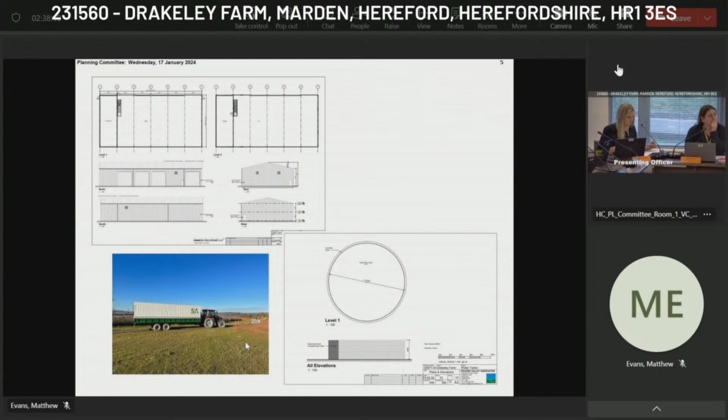This slide identifies the proposed relocated access. If approved, all vehicle access into the site in connection with the growing of soft fruit will be from the proposed new access at the northern edge of Marden Road. The access has been designed to accommodate the required manoeuvres and visibility splays of 56 metres in each direction, as a result of the speed surveys undertaken. The existing access adjacent to the residential property 3 Hawkshead Cottage is to be closed, with landscaping and planting provided adjacent to the boundary with the new access track and residential property.

It is recognised that traffic generation arising from the proposed development represents a key issue for many of the local residents and that of the parish council.

As already mentioned, once the fruit has been picked, it will be transported back to Brook Farm to be processed. The route to be taken is that from the new access through the centre of the village and the residential area of Walker's Green, back to Brook Farm. No HGVs will access the Drakeley site. The fruit will be transported via the tractors and trailers, a photo of which is included at the bottom.

The application has been supported with a transport statement which identifies the proposal will result in 12 two-way movements per day from the site back to Brook Farm. This is 6 arrivals and 6 departures. All seasonal workers are to travel to and from the site via the network of public footpaths.

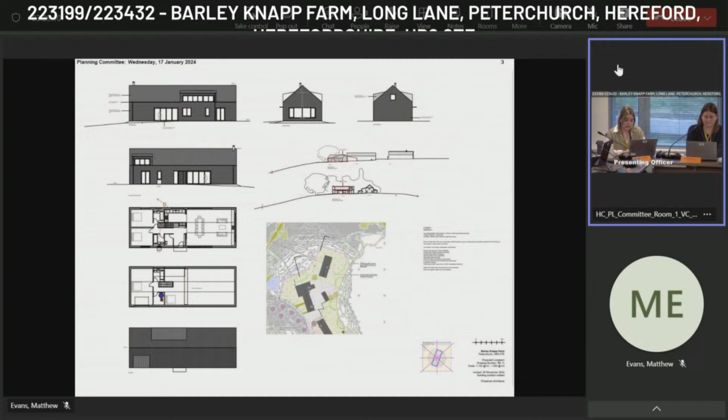The second dwelling, annotated as D, is the embedded unit. The proposed location away from the farm lends itself to the provision of a more contemporary design, nestled into and making use of the hillside, in a landscape and setting-led approach. This would be less visually prominent than the long barn form and reads as more in keeping with the immediate surroundings, utilising the gradients of the site to sit onto the hillside. The grass roof would visually integrate the unit into the landscape and aid the built form in extending naturally from the topography. The exposed elevation would be constructed of timber to read in keeping with the natural landscape and draw minimal attention through limited glazing.

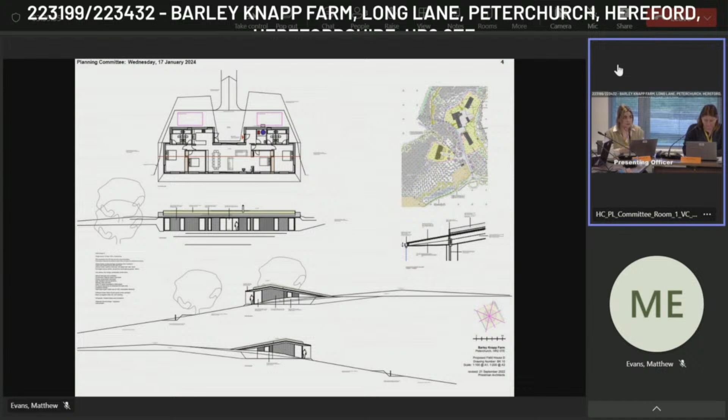With regards to residential amenity, it is not considered that the proposal would have an adverse impact on the amenity of neighbouring residents in terms of loss of privacy, overbearing or noise, given the sufficient distance between nearby dwellings. The proposed dwellings are orientated in a manner so to not overlook other occupants within the farmstead, with sufficient private amenity space provided for each unit. The Environmental Health Officer raises no objection to the scheme on the matters of noise or nuisance.

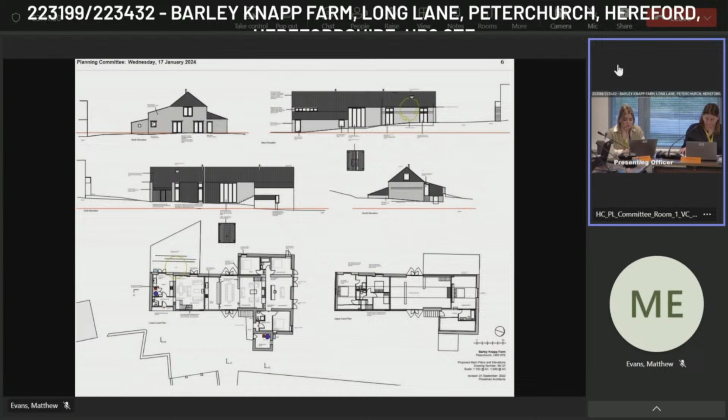The stone farmhouse is a Grade 2 listed building in its own right, and it's noted that the building requires restoration and updating. This offers the opportunity to reverse some modern interventions that fail to respect the historic character. As noted by the Principal Building Conservation Officer, the return to sandstone roof tiles and replacement of existing modern windows are considered conservation gains. Other external interventions of benefit include rebuilding the chimney stack in stone, careful removal and reopening of appropriate openings, insertion of conservation roof lights and repointing in lime mortar.

The Building Conservation Officer raises no objection to the internal work, stating that this is a well-considered scheme, respecting the existing character and fabric of the listed asset. Additionally, the repair and conversion of the redundant granary is considered acceptable, retaining existing openings, spatial and structural form, whilst remaining subservient to the host dwelling, given its ancillary relationship.

In considering the wider heritage implications in terms of the setting of the listed asset, it's recognised that the proposal would represent an intensification of residential use. However, this has been proposed in a manner that respects the historic character and significance of the listed asset and their setting. The proposal offers conservation gains through the removal of the portal frame barn, the repair and conservation of a redundant historic barn, and the conservation of a historically important farmhouse. As such, it's considered that any heritage harm that would occur is considered to be less than substantial, and in the NPPF's paragraph 208 test, it's considered that this harm would be outweighed by the benefits of the scheme.

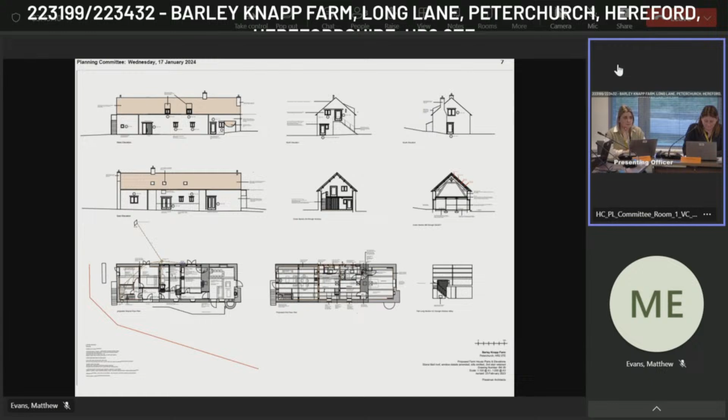Considering the initial comments from the landscape officer, it's accepted that the proposed dwelling 2 occupies a separate location from the main farmstead, and in this sense would be a departure from the existing character of the site, introducing new built form in a currently undeveloped field. However, embedding the unit into the hillside would reduce adverse visual impacts in the wider setting and would not detract from the overarching historic settlement pattern of sporadic agricultural units characterising the area. This location and approach is argued to contribute positively to the character and architectural interest of the rural area through good design, whilst allowing the farmhouse and historic unit to remain the principal built form on the site.

Following the submission of the landscape management plan and rebuttal letter, a further consultation response concluded that the principle of sympathetic renovation and reuse of existing buildings would have minimal impact upon the landscape, recognising a benefit through removal of the large portal frame barn and replacement with a long barn style dwelling. No objection is raised to the meadow grass roof of the embedded dwelling, tree and orchard planting and soft landscaping plans, with conditions recommended to secure full specifications for hard and soft landscaping, material colour and finishes, and removal of permitted development rights.

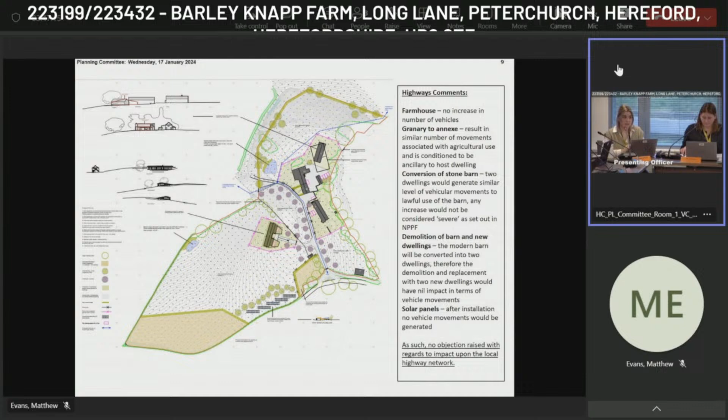The PROW and Ramblers' Association comments are taken into consideration and the applicant is aware of the formal requirements. However, it's recognised that the formal diversion would not be undertaken until the application is determined. It is noted that the existing footpath dissects the modern barn, so the diversion is likely to offer improvements, moving the track away from the stone barn also. An informative has been included to remind the applicant of the required procedure.

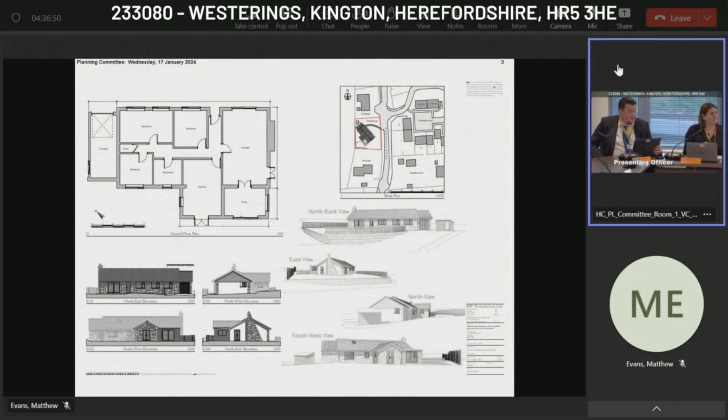The existing attached garage will be demolished and replaced with a single-storey structure running at circa 45 degrees to the main dwelling house. This element will measure 6.5 metres long, 6.8 metres wide, with an overall height of 2.3 metres.

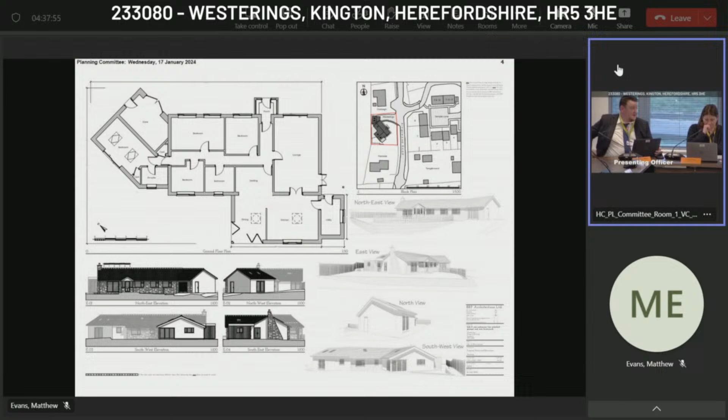This slide demonstrates an illustrative render of the proposed development, including the materials. These materials are stone and render to match that of the host dwelling, in addition to roofing, which is also to match. Next slide, please.

The proposed rear extension and porch have been designed in a manner that reflects the host dwelling, utilising matching render, stone and plain clay tiles. This will ensure continuity in appearance. The proposed flat roof utility extension will be clad in vertical cedar boarding under a single ply membrane roof.

It's considered that the proposal is entirely acceptable and policy constraints with regards to design and scale would not depart from the character of the host dwelling or the surrounding area. No concerns have been raised regarding the impact the extension would have on the amenity of neighbouring dwellings by way of loss of light, overlooking, and sense of overbearing scale. However, this must be given due consideration. Given the small scale of height of the proposal, it is not considered the extension would lead to an enlargement considered overbearing to such an extent that it would cause harm to the amenity of neighbouring dwellings.

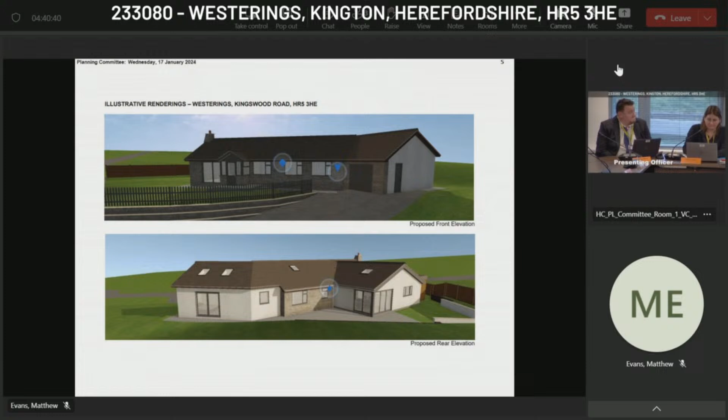Thank you. Oh, thank you, Matthew. Sorry I didn't introduce you. Your name is Matthew Evans. Welcome. It is. Yes. As we haven't got any speakers registered, can I please ask the ward councillor, Terry James, to speak?

Thank you, Chair. Just to say, this is there by dint of being a planning officer's application, and loath as I am to support a planning officer's application, I have to say there are no reasons why this should be refused, and I hope you'll move the recommendation and we can get a late lunch.

Councillor Simmons. Yes, sorry, we are moving to debate now. Thank you, Chair. I think this is completely within scale, seems entirely appropriate, good design. Fully agree with the recommendations from the report. There are no objections on the council website. Therefore, I move that we support the recommendation. Thank you.

Seconded, Councillor Stone. Well, with that, sorry. Madam Chairman, can I just ask, why has this come before committee? Because he's an officer. Very sorry.

Right, so we've had a proposer, we've had a seconder, and we now move on to the voting. Oh, you need to come back, sorry. Sum up. Nothing to say. Thank you. Right, so let's move on to the vote then.